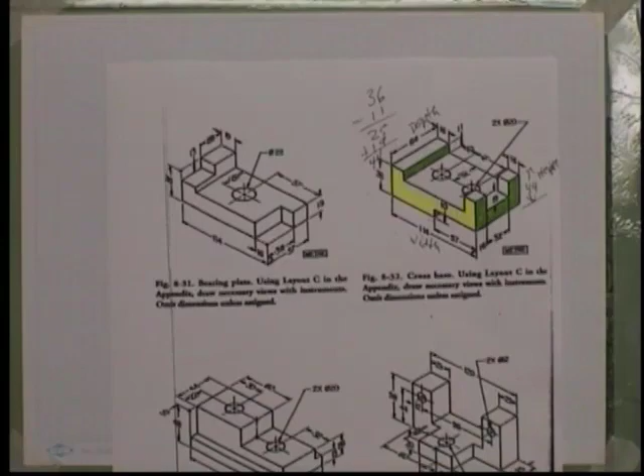When we're looking at an isometric, what we're actually seeing on the drawings we've done so far are isometric drawings, so we're pretty much just copying what we see. Remember, this is always the front, this is always the right side, and this is always the top. In an isometric drawing, this would actually be our start point. You can start anywhere, but it's easiest, especially at the beginning, to start from here, so you can actually see the isometric axes.

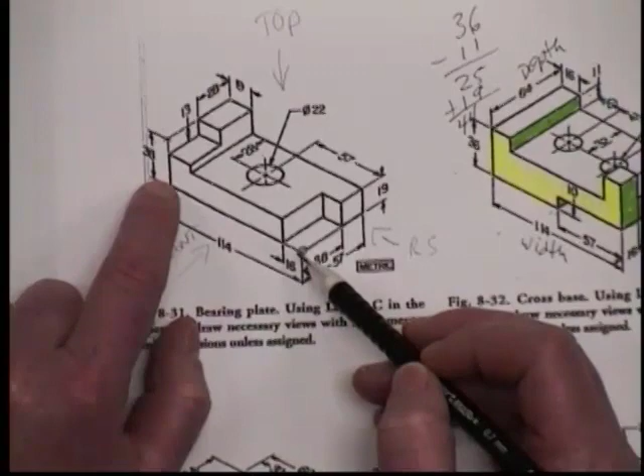So anything going back in the depth that we would see in the right side view is going to be at that 30-degree angle. Anything going to the left here that we would see in the front view, that would be a width dimension, is going back to the left and also at 30 degrees. And anything we see as a height dimension is going to go straight up and down.

So if we were to color code things that we were actually going to see, just like in this picture where we have yellow as the front and green as the right side, we could color code our lines. Anything going back to the right would be an isometric line at 30 degrees in that direction.

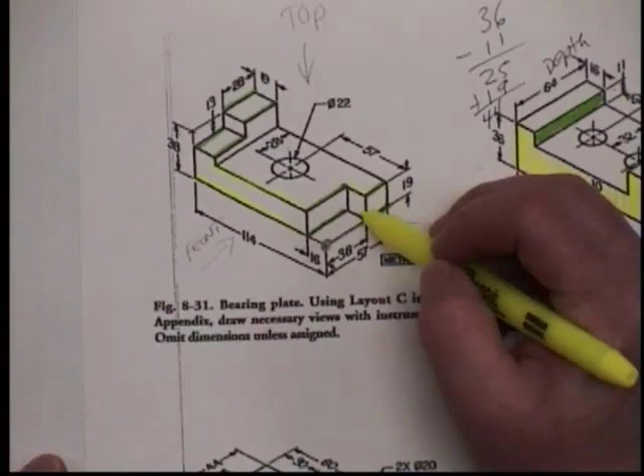So this just gives you a perspective on how this happens. All of these lines are going to go back towards the right, and they're going to be depth dimensions. And anything that's going back towards the left would be these yellow lines, and these actually show a width dimension.

So all of the lines that I have highlighted are either yellow for the width or green for the depth. And anything else that I don't have highlighted is actually going to be at 90 degrees for the height.

So if I took this pink marker and just shaded everything in that was going to be a height dimension, we could see that all these areas in pink are height. And I actually missed one in the depth—this one would also be a depth. So height dimensions are in pink.

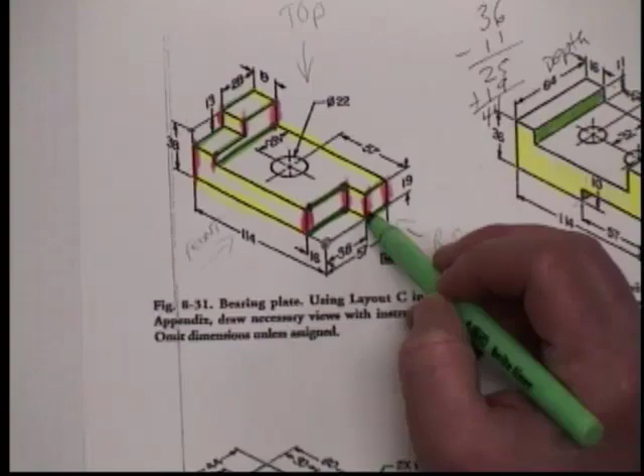The width dimensions are in yellow, and the depth dimensions would be in the green. So when we're looking at isometric drawings, sometimes you'll get confused because the lines start blending in together, so you just have to be real careful and know where you're at on the drawing.

Okay, so we're going to start out. This is a metric drawing, so we're going to use our metric scale. You're going to have to get your metric scale out. Remember, we're using the 1 to 100 scale, which is actually in centimeters, but each little notch here is a millimeter.

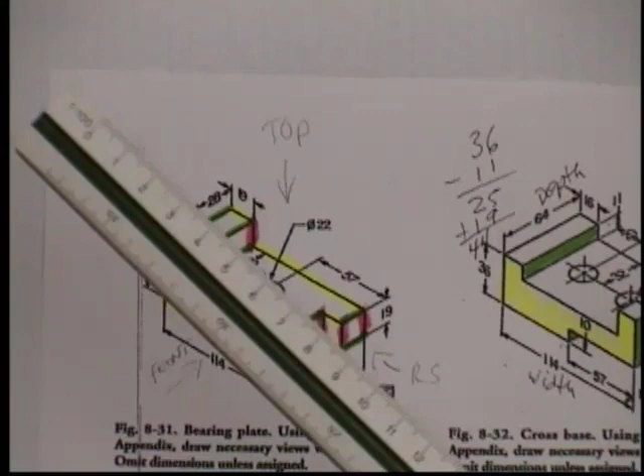My camera's zoom is not updating, but each little notch right there—let's see if it can focus a little bit better. Metric scale: each one of those little tick marks is a millimeter. So if we have 114 millimeters, then on the 1 to 100 scale, that's actually 11.4 centimeters.

All right, so on our paper we're going to put 2 of these objects on this sketch. We're going to draw one of them starting, I don't know, we'll try to start right in here and maybe put the other one up here. We'll see how much room that we have. So you don't have to start it right at the bottom, but maybe 2 or 3 blocks up.

And how do we know? Because I'm telling you to start it right there. When you've done a few of these, you'll get to see about where you need to start. For right now, this is your first one, so you just kind of got to trust me on this. And this start point, so I went not quite halfway over, and it looks like 1, 2, 3 squares up.

And remember, on isometric paper, you have 3 different lines. One of them is going to the left at 30 degrees, one of them is going to the right at 30 degrees, and then one of them is going straight up. So you just have to kind of remember where you are on your drawing, and you'll see what I mean in just a moment.

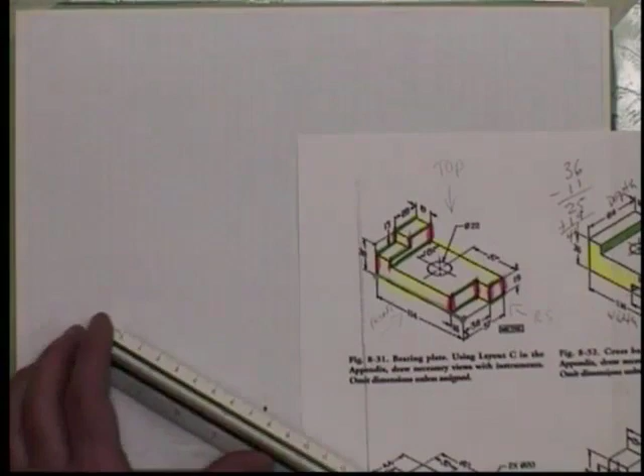So I'm lining my scale up. This is very important. You have a grid line that goes back to the left. You're going to line your scale up along that grid line, and you're going to make a line that is 11.4 long, along the grid line that goes back at an angle. And it just so happens that we end on another grid line.

So you can see my dots, and I went back along that grid line. I'm trying to zoom in so you can see my grid line. Still kind of hard to see, but my grid line goes back in a straight line towards my other measurement point. Once you get those dots, you can go ahead and make your line.

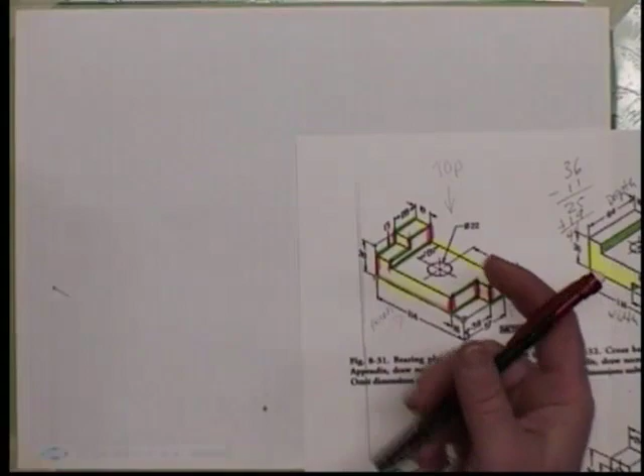Okay, we went 114 millimeters, and that means 11.4 centimeters.

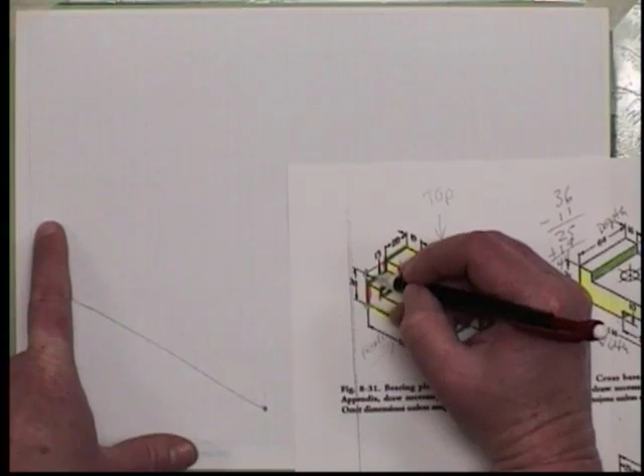So we were here, we went here. Now our next dimension, if we're just following our lines here, our next dimension to box this in is going 38 up. So our next point is going to be up here. We're going to go up 38, straight up. This is a height dimension because remember this was pink, and we're going up 38.

And on our 1 to 100 scale, 38 is 3.8 centimeters. So we're putting our scale along the line that goes straight up. If we do that correctly, we should still land on a grid line. We went up 38, which is 3.8 on our 1 to 100 scale, so we should land on a grid line. We should have landed on a grid line here and here.

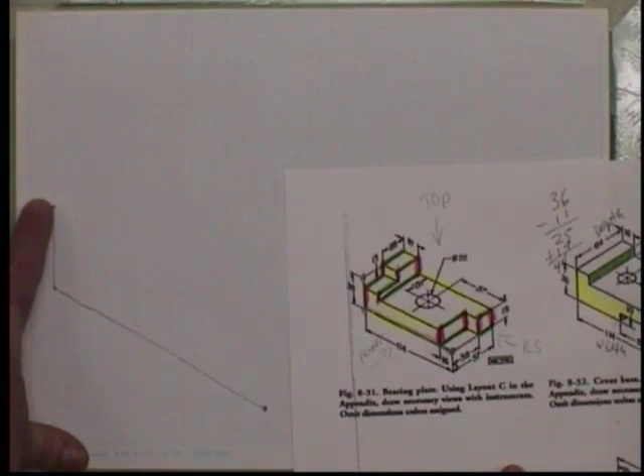So I went back along the isometric line, 114, and I'm going up 38. So this point, where my finger is, is the same point as this corner here. This point was the point that we got to from that first line. So if you draw a point on your object as you're drawing your lines on your paper, then you're always going to know where you're at. And that might not mean a lot right now, but you'll understand once you get drawing on your own how you can get lost.

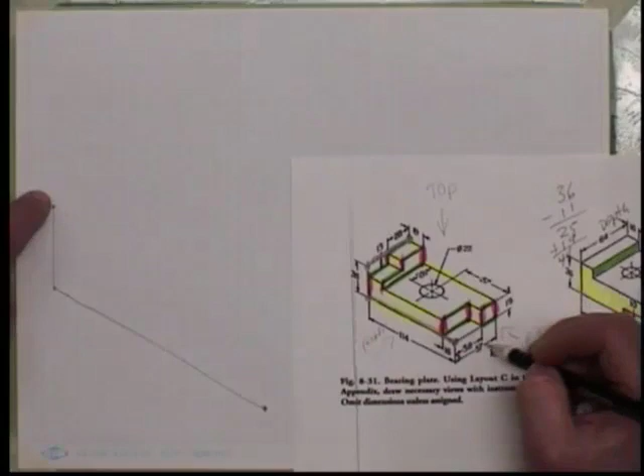So the next line that we need to make to box this in is going to be this line here. We're going to go all the way back to this point at the end right here. So that whole distance, we see that dimension right here is 57. So we were here, we drew a line back, we drew a line up, now we're going to draw a line, and this is a depth dimension because it was green. So we're going to go back to the right, 57. That's going to be going along this grid line here.

So this 30-degree angle that's going back to the right, and we need to go 57. On your 1 to 100 scale, that's 5.7, and that should land right on a grid line.

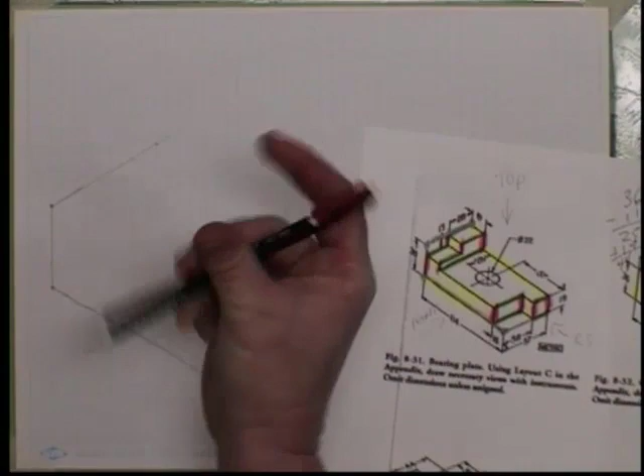So now, if we follow our sequence, we were here, we went straight up, and then we're going back towards the right, that 57 dimension. So now, we're right here on our drawing.

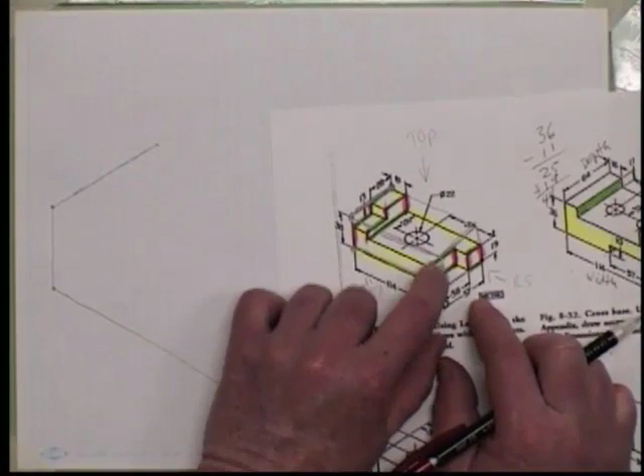If we want to box this whole thing in, we would come back down this 114. So what that would look like, because we don't actually have a line, if we were boxing all of this in on our paper here, we would have to actually make these construction lines that I just drew in. We're going to do that just because when you start out in isometric, that's a good thing to do just so you can see it.

So we're right here. We know the whole width of this thing was 114. We already have that dimension. So if we come back to our start point right here, we know that we can draw a line straight up, just like we did here. These two lines should be parallel. Just draw a line straight up, and then from this point, you'll come back along that grid line until these two lines meet.

So I drew my line straight up. It was a little bit too long, but when I brought this back along the grid line, I know that I can erase some of that.

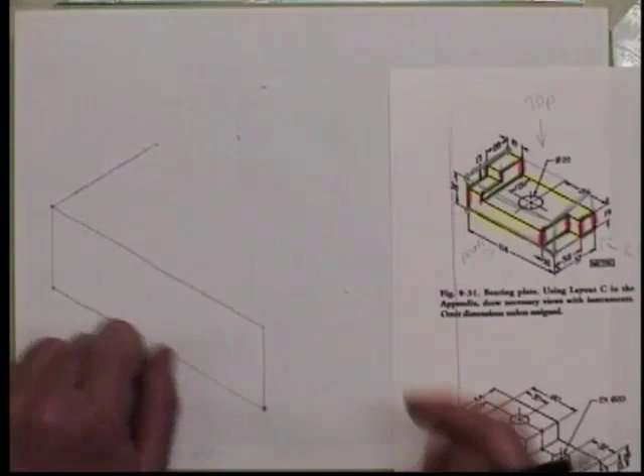So the great thing about isometric is once your lines start to meet up, you don't have to do a lot of measurement, but it can also get very tricky because you really don't know where you are on the drawing sometimes. So all I did is draw my line straight up, draw this one back along the grid line, and where they meet, I erase down to it.

Perfect. I'm going to do the same thing going back this way. I'm just going to take, at this point, make my line back to the right. I don't really know how far to go, but once I come up here where I actually did measure, I can just bring that line across here in my width. And notice this line is parallel here and this line is parallel.

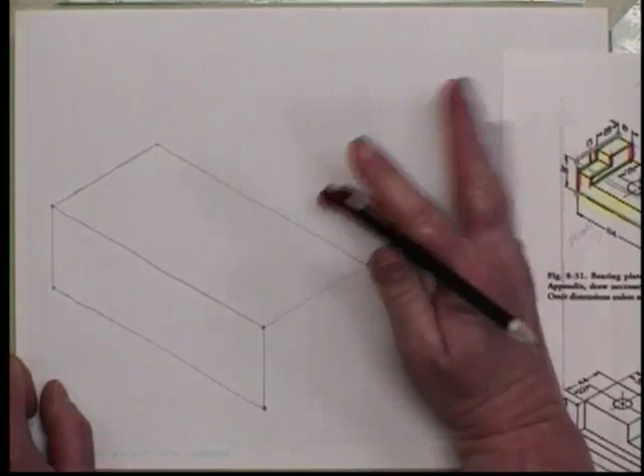So as long as your lines are parallel, you're okay. And then I know, okay, I need to terminate that line right here, and you can just erase what you don't need. Because we actually measured this line and this line, that's why we could do it that way. If we didn't measure, then of course we couldn't do it that way.

So we only have a couple more lines until this is boxed in. So we can do the same thing here. We can take a line straight down, and where this line meets it, we know then that's the corner. So I can erase what I don't need of the line that I brought straight down. So now I have this whole thing boxed in.

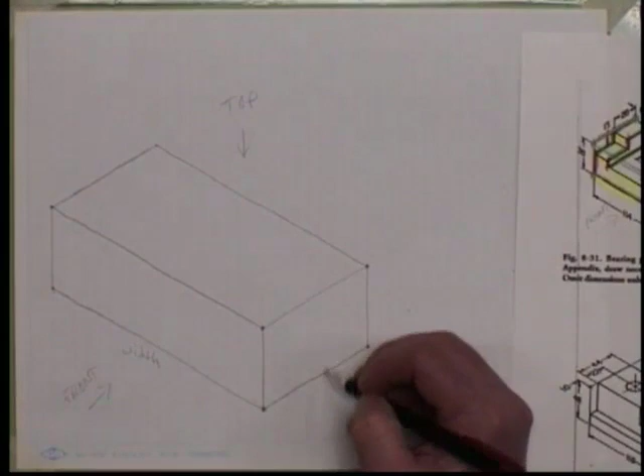So remember, this was my front, and you guys don't have to write this on here. I'm going to write it just so you can remember. This was my front, this was my right side, and this was my top. I see width here, I see depth on the right side, and then in the right side and front, I'll see height.

So now that I have this boxed in, I can go back in and put in the finer details. So if I start from that same start point in that front corner, I know I can go back 16 and over 38 to get this part right here that's cut out.

So I can do that with my scale. I'm going to take my scale and put a 16 dimension right along that line. And 16 is 1.6. Now this one happens not to fall on a grid line. I'm actually right in between grid lines.

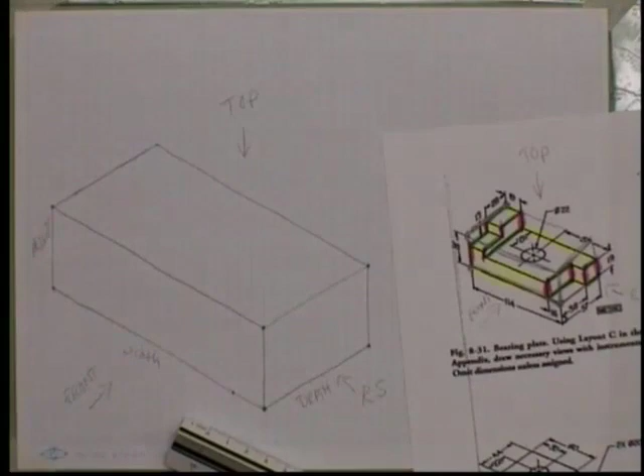So I went back 16 here. If you're in between grid lines, the best thing you can do is just keep your lines parallel. You know that here in this pink area where we need to go up, we're going to be at 90 degrees. We don't have a line to follow, but we can keep that parallel.

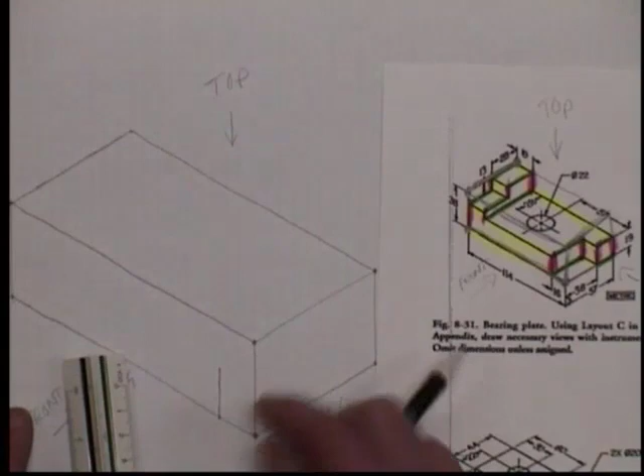So we're going to measure 19 straight up and down. So straight up from this line, I'm keeping it parallel to my two grid lines. I'm going straight up, so it should be parallel to this line here. And any grid lines that I'm in between, I just want to keep it straight up, because that's a height dimension.

Mine happens to fall on this grid line. I know that this distance was 16, so I know it just comes right back down along that grid line and meets up here. And I actually don't have to make that line. We won't need that line, so don't make it. You'll end up having to erase it.

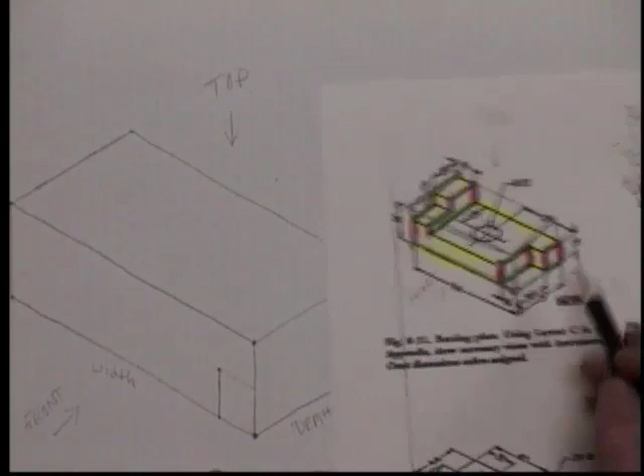What this gives us though, what this surface gives us, is we're right here now. So we are on top of the surface where the hole is. So this dot and this dot are the same spot on the drawing. So we do know that we need to go back at 38 here.

So if we go back to the right, we're still in between two grid lines. So just to show you what this is going to look like, I want to keep it in between my grid lines when I come. So I need to keep it parallel to this line, and I need that to be 38. So I'm going to have to actually measure this. It's going to be 3.8.

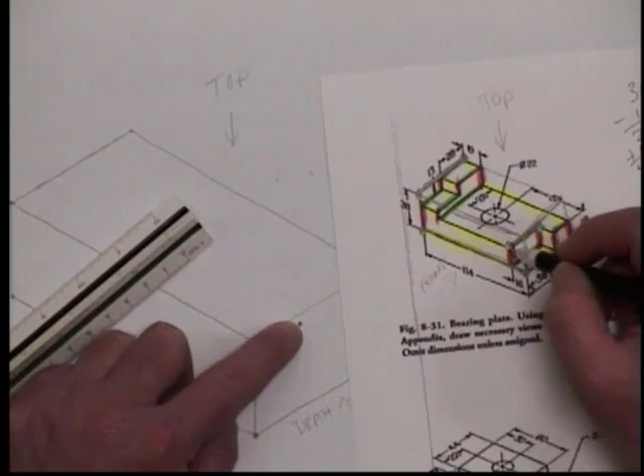So I kept it parallel to my grid lines. I went 3.8 over. So that puts me right here. So now I'm right here on my drawing. I know that I need to go back down that 19 for this corner.

I've already measured that, so as long as I'm staying in between the grid lines, I could even make this line first if I wanted to, because I know I need to go 38 back in this direction. So it doesn't matter which one you make first, as long as where they meet up, that's your corner.

So the face that I have right here is this same face that I'm coloring in on the drawing. So this rectangle is this face. And to get this smaller portion here, we know that we're just going to come back out and make that.

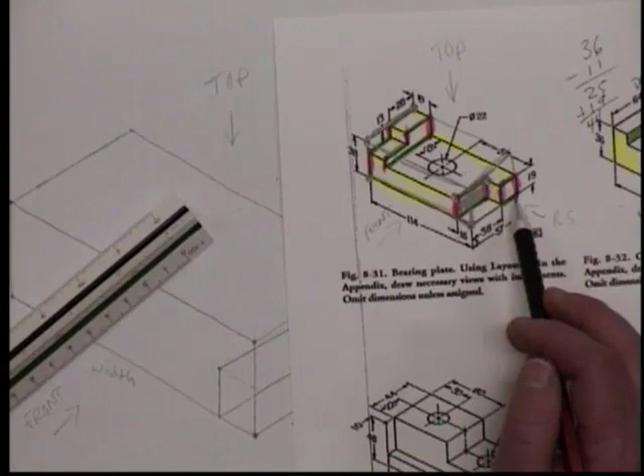So this was 38, or 3.8 on our scale. So now I know that I can come straight out here. I know I can go straight up to where these meet. And then this just ends up going straight over to where the line is already there.

So eventually all of our lines start to meet up. You just got to make sure that you're going in the correct direction. That's key.

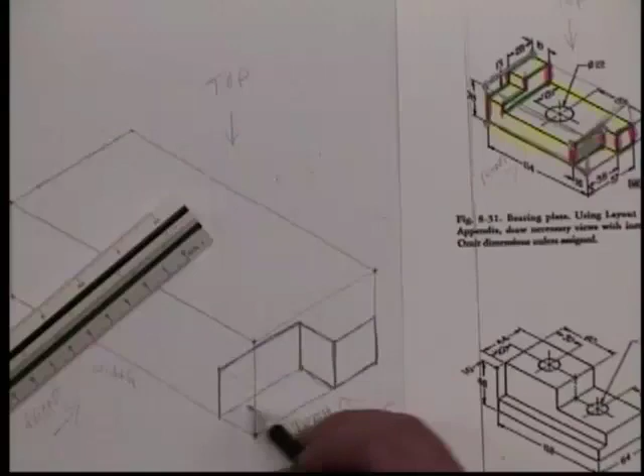Okay, and don't shade it in like I did. I was just trying to give you a better picture of it on the screen. These are still going to be nice smooth lines like our multi-views.

But now you can see this surface, and then we also have this surface right here, and we also have this surface.

And we're keeping our lines parallel. You'll notice the ones with the width dimension are parallel. The ones with the height dimensions, parallel. The ones with the depth, parallel.

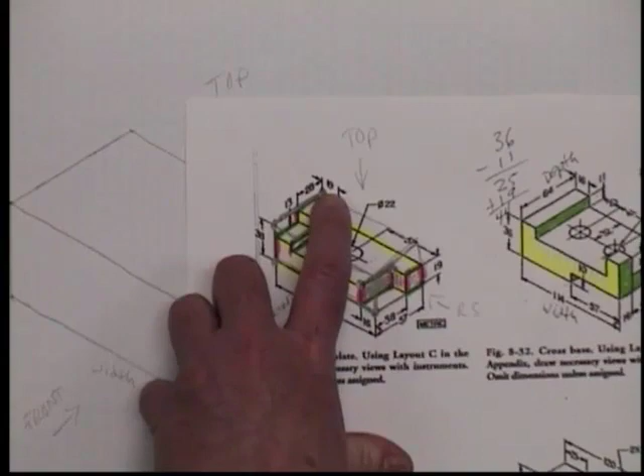So now we have the back part of this area that we need to work on. We know that we can come over 19 here and fill in some of this detail. So it would be easiest probably if we started back in this corner and just followed our dimension and went over 19 to get to here.

So let's do that. We're going to have to measure this because we don't have it already as a line. So we're going to put our scale along the line that we have and measure over 19, and it should put us on a grid line. So here's my 19 spot, and that puts me right here on my drawing.

And I know that I need to come out 28, so that 28 is going to be in this direction, somewhere along this line here. So I'm coming back this direction 28, and I see that from my dimension.

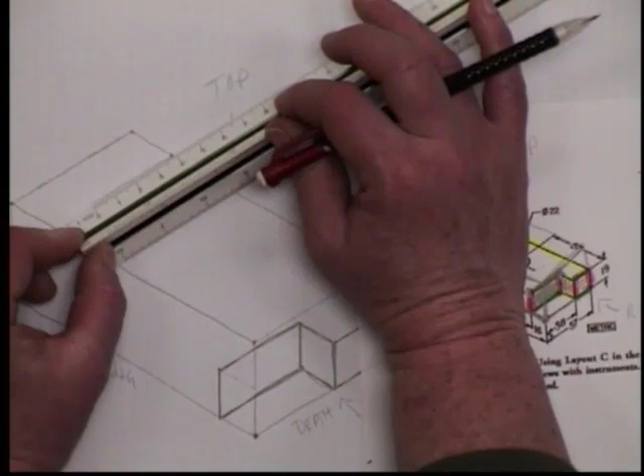So I'm putting my scale along that grid line. I'm measuring 28. So once I have that 28 line, that puts me right here at this corner.

And I know, 19 back, so if I'm going to make that top surface there, I've already got my distance. I just need to bring that back this direction. So now I have this surface here. It was 28.

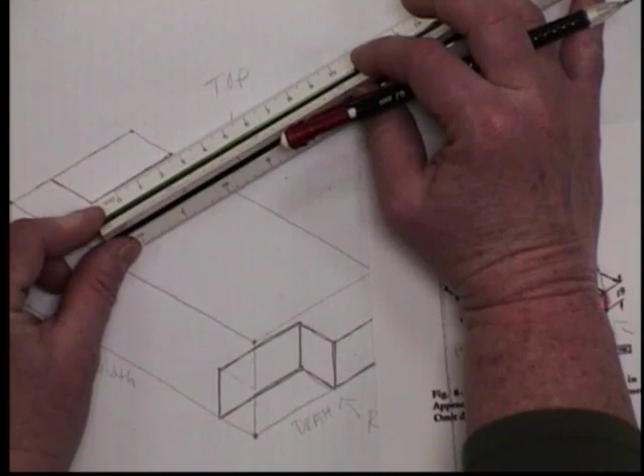Yeah, I'm sorry guys, I went 3.8 on that last one. So let me fix that. So I went a little bit too far, 1 centimeter too far. So it should actually be right here. So that looks more proportional.

All right, so the next dimension that we need to do, because right now we're right here at this corner, we need to go down 13. So we're going to go straight down, and remember this is a pink one, so it's going to be a vertical line. We're going down 13, which is 1.3 on our scale.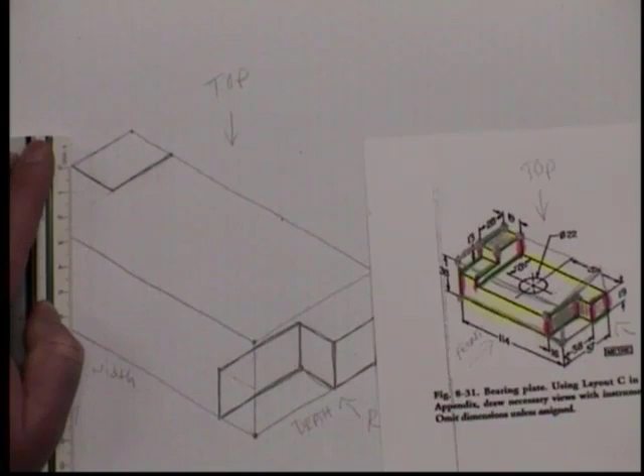So it's straight up and down—remember, that's a vertical line. Once you get it, we know we need to go straight up and down right here too at this adjacent corner. Just try to keep it parallel to your grid lines, because mine are landing in between grid lines.

Once you have those lines going straight up and down, then you have a width dimension. That should be parallel to the one on top there. So these two are parallel, and then these two are parallel.

And from there, it meets up with the frame of our object. So where we boxed it in, we just bring that line all the way out till it reaches the edge here.

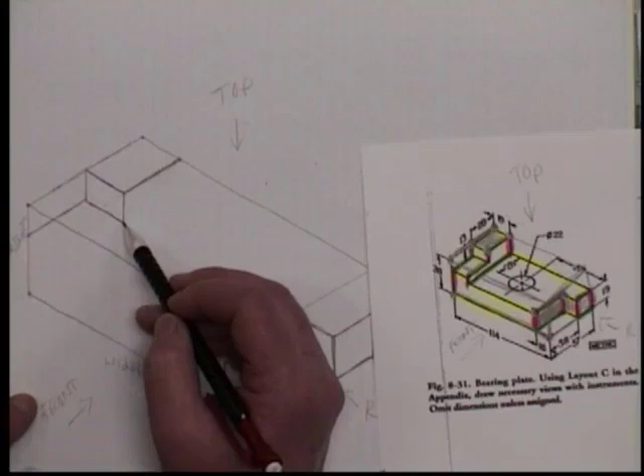Now we can't do that with the other side, because remember we have to come back in this direction—that width here. So we come back before we meet it up at that corner. A lot of times people will just try to make this line all the way out to here, and that doesn't work because they'll forget the width.

So now we have this face, which is where I'm shading in on the drawing, and then this face is here.

So we got a good bit of this drawing done. We still have one more main surface that we've got to get though.

We know that the main surface here is up 19 from the bottom, and we already have that corner made. So we have that surface.

We've just got to take our line back, and you'll notice there's a little bit of an area right here that goes up in the height dimension. So we can't just make this line to the corner there—we have to make sure we keep that little bit of height left too.

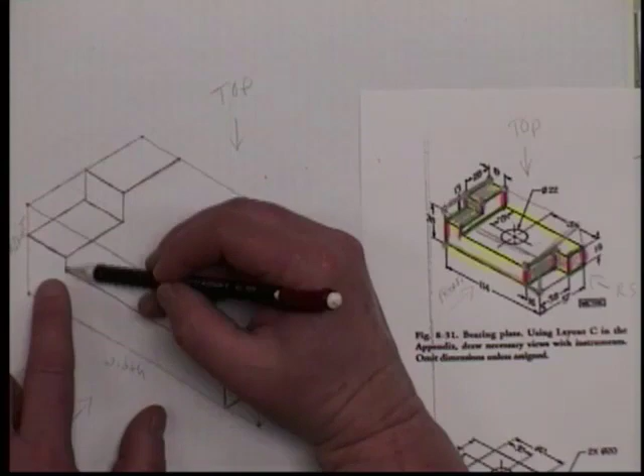So the easy way to do that is just make a line straight down here. We're not given that dimension, so we don't know how long to make that line, but we do know that this corner goes back to meet it. So if we were just to draw this corner back at that angle where these two lines are parallel, then we know how much we need to erase off right there. We knew that there was just a little bit of a height here, and it should meet up with the surface there.

Same thing on this side. We know that this corner is actually this corner on our drawing. We know that goes back. We need to create this line straight down. We don't really know how long that line is because we're not given that dimension—we could do the math if we wanted to, but we don't have to. We'll just make a line straight down here.

And where this line comes back along that grid line, where they meet, that's how we know how long that line should be. All these lines should meet up because they're corners of the same object, and then those two corners should meet with a parallel line that's parallel to the depth dimension. These just happen to fall on a grid line.

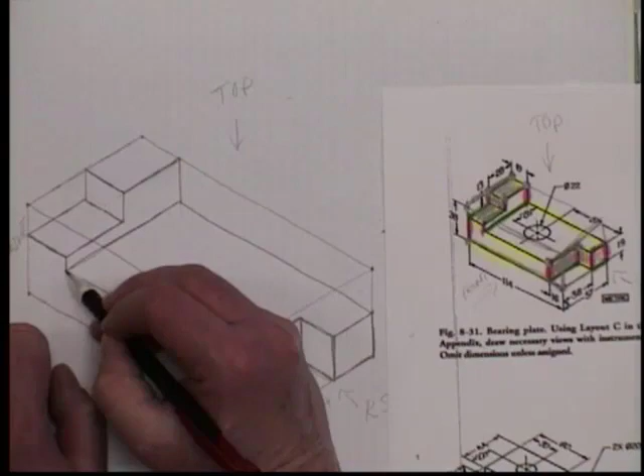So I'm darkening in my lines heavily so you can see them on the screen. But remember, your lines are just a nice, smooth, single stroke, darkened line—an object line, not a shaded in line like mine.

Okay, so you can kind of see how this object is shaping up. The only thing else that we need is our hole.

So in sketching holes, remember, we have to create a box that is the size of the diameter of the hole, and we need to know where the hole is located. So we're given two location dimensions—the 57 and the 28. And then we're given the size of the hole, which is 22.

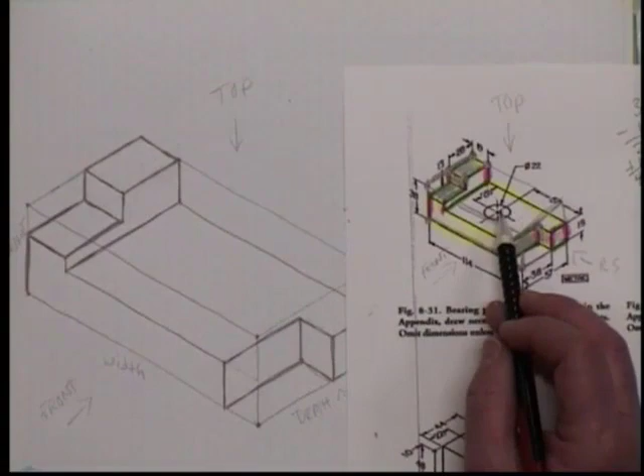So the first thing that we would do is measure the 57 and the 28 to get the center, and then we would box in, using our grid lines, the size of that diameter.

So to do that, you're going to use your scale. We're going to get that 57 first. So let me darken in some of my lines.

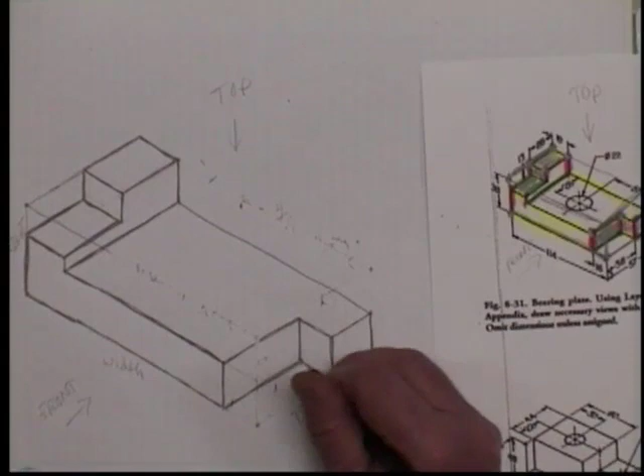And you can kind of, because we no longer need some of these construction lines, go ahead and erase part of the box that we initially made to get the height, width, and depth. We don't need all of that anymore, so we can erase some of that out just to get rid of the excess lines.

Remember, I'm darkening in just so you guys can see.

To get the location dimensions for the hole, we're going to measure - we're given this 57 from the corner here. I usually just keep my scale at the same point where it's giving me the dimension, that's the easiest thing to do. So from that point in that corner, I'm going to measure up 57.

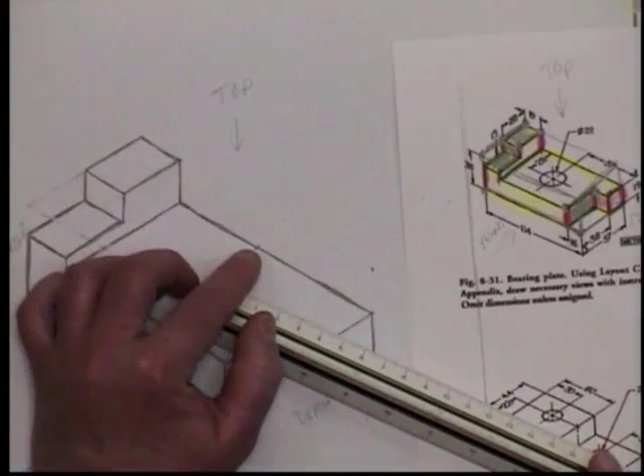Along that line, I'm putting a little measurement mark right here. You can see my little measurement mark. And then from that mark, it's telling me that I need to go in 28. So it actually landed on a grid line, so I'm just going to follow that grid line in with my scale and measure 28, which is the 2.8.

So if I make center marks, I need to make them parallel to my grid lines. Remember, all the lines are parallel to the grid line. So that's my center mark for that circle.

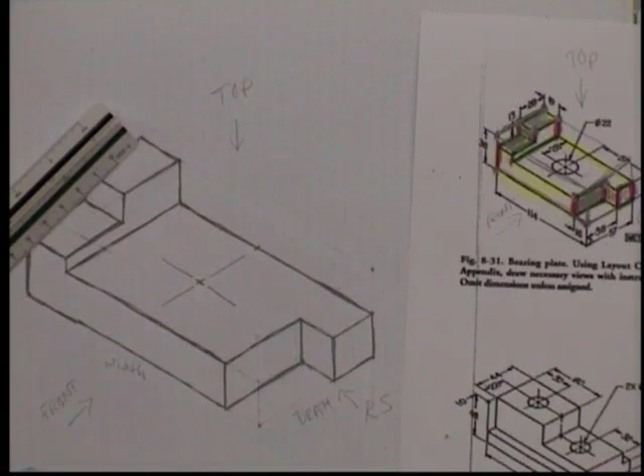And I know the diameter of the circle is 22. So if I'm going to box that in, I have to know the radius, because when you create your box, remember we go to either side of the center point, the radius. So that would be 11. So I would just take my scale and do 1.1 on all sides, and just put a little measurement mark there.

Make sure that you're keeping it parallel to the grid lines, and you're measuring along the grid lines too.

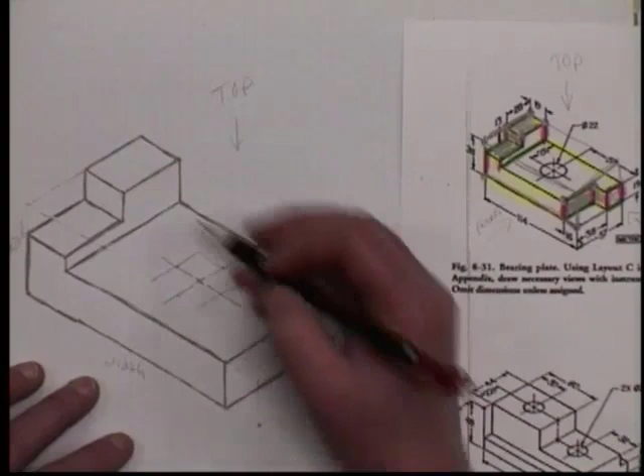When you're doing your box, the same rules apply. You want it to be a construction line, but you also want it to be parallel to the grid lines. And you'll see why this is an ellipse when you have this box made. So there's my construction box. I could probably do a little bit better job with this line, making it parallel.

And then, just like you did with your circles, you'll do a quadrant at a time, and you'll see that when you do the quadrants here, that they are more elliptical, because two of the quadrants are a lot longer in your arc than the other two quadrants.

So now we have a circle. We can erase our construction lines for our box. And the only thing that we would have left is just to clean up our lines and erase our measurement marks and that kind of thing. But that gives us an isometric of figure 831.

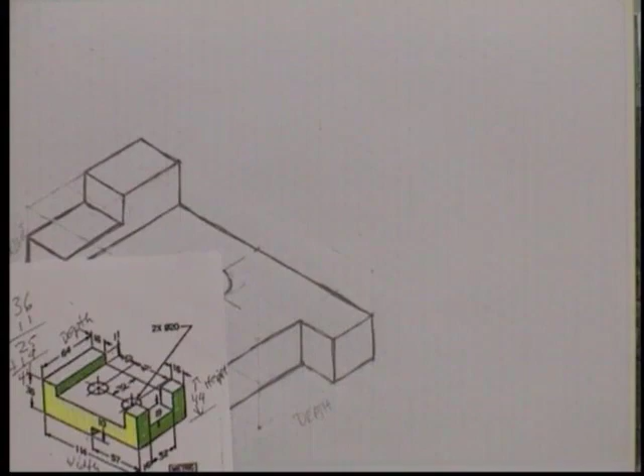Okay, for the next one, we're doing figure 832. So if we look at this object, we know that the width, again, is 114. The height on this side was 36, but remember, overall it was 44 because we had to add the 19 here. And then the depth is 64.

So on this one, it's going to be a little bit more confusing if we box the whole thing in. So I'm going to show you how we'll start out with the full width, but we'll only go up 36, and we'll go ahead and make this surface, and then we'll come back and start back at the start point to get the rest of this front area.

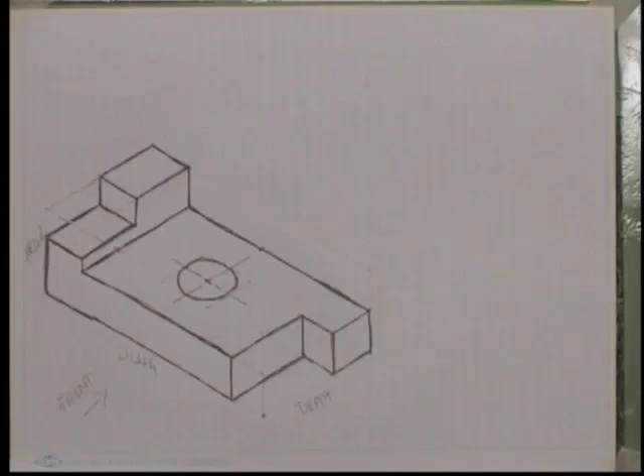I'm going to use the same paper. On your paper, we drew the first one right in here, so our second start point can probably be right in here - that would give us plenty of room. We're eyeballing it; we can kind of tell, since we've done one, about how long this is going to be, so we should be able to go back and have plenty of room. We might even be able to go up a little bit on that.

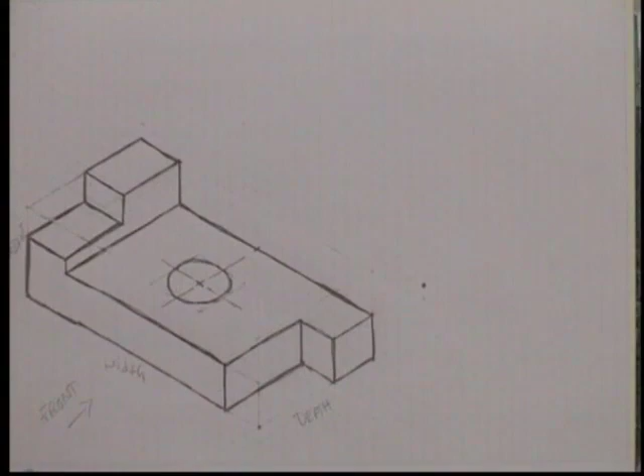So for now, this is okay - we're doing a sketch, these are our first isometrics. So we have our start point. What we want to do is take our metric scale, just like we have been, and we're going to go in this direction to the left, that 114. So the same thing applies - we want to line it up with the grid line. And remember, 114 is 11.4 on the 1 to 100 scale.

And so I'm pretty close right here. That's okay. Now, if you're running into it, then you probably do need to move your start point up a couple notches, so you don't want to run into it. So this was my start point, I went back 114. I'm going to go ahead and make that line.

And we're on a grid line, so basically you're just following the grid line. So the same thing that we did down here with our start point and our end point. We started here, we went back towards the left along that 30-degree line towards the left and made this line.

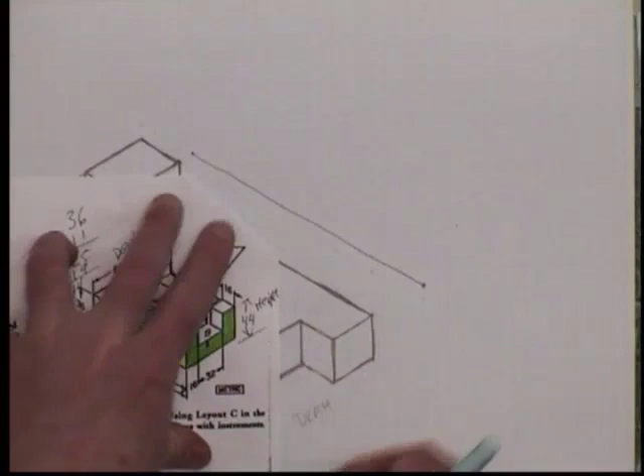Before we said we boxed it in, this time we're going to do it a little bit different. We're not going to box everything in. Before, I still had the dots showing you where to go, but this time we're just going to follow the lines of the object. So right now, we are here.

So this dot and this dot, same spot. So we went 114 millimeters back. And we said we're not going to actually box this in, we're just going to go with the lines that we have. So if we look, this is a 36 dimension going straight up in our height. So we're going to do 36 up from this line. So from this dot, we're going up 36, which is 3.6 on our scale.

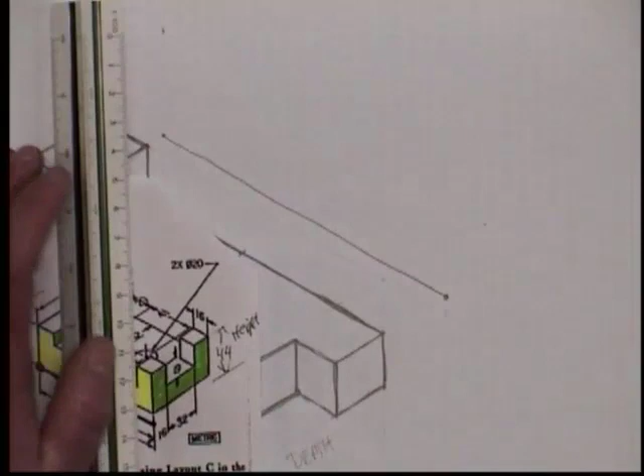And that should put us right at a grid line. We're like half a millimeter below that grid line, so just go ahead and go to the grid line. So now that we have our point, we can go ahead and draw our line up. So that puts us on the object, that puts us right here.

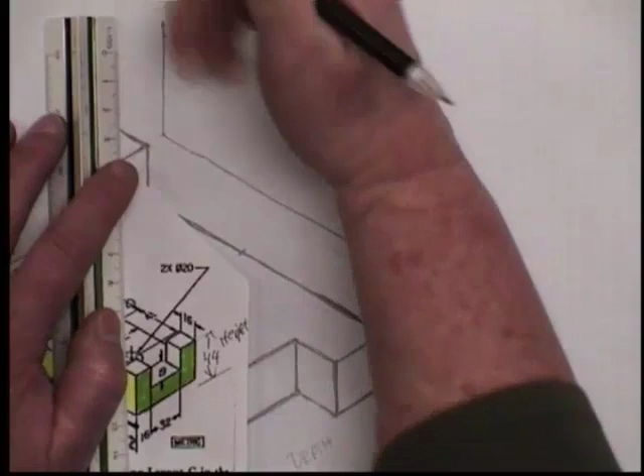It was 36, and we're going straight up. So 36, actually, I'm sorry, I went up too far. We're at half a grid line. We should be right at half. Yeah, it's not quite right at half. That's why I went ahead and put it up to that grid line. We're just a little, like a hair below the grid line. So we went up 36.

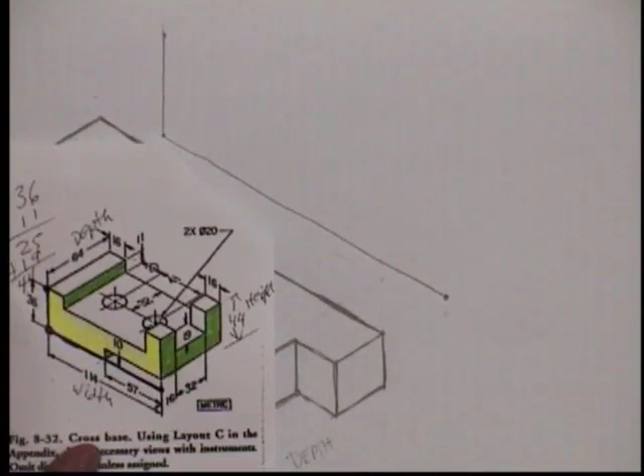And now if we're following our paper, following our dimensions, we can come back in this direction that's parallel to our first line that we made. We can come back 16 right here. So this time we're not boxing it in, we're just following the lines of our object. So from this point, regardless if you had it at half or on the grid line, it should be right in the middle of half and the grid line, just a hair shy of a full grid line. But wherever it is, it needs to be parallel to a grid line. So along that parallel, you can use your scale to make sure you're parallel. Line your scale up parallel to the grid line that's going in the direction you need it to go. And you're going to come back 16, which is 1.6.

Okay, so this line and this line should be parallel. And if we look on our paper, now we are right here. So we're right here, right here.

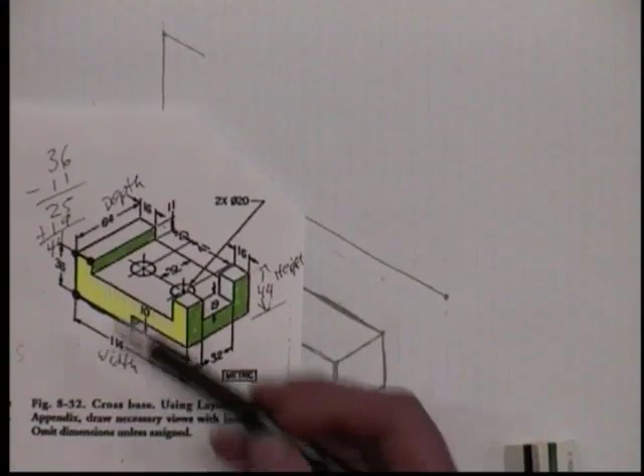And then in order to complete this face of the object, we can go back in our depth 64. Mine may go off the paper a little bit, yours may go off the paper a little bit. That's okay, just be in line with a grid line, be parallel. So we're going to go 64. It's okay, just keep making it. Just be in line and parallel. And if it goes on your desk, you can erase it.

So mine ends up being on the paper, but off the grid part. And that's okay, we could move it and start over, and start somewhere down in here, but we're okay. This is to teach you how to get in the process of doing isometric.

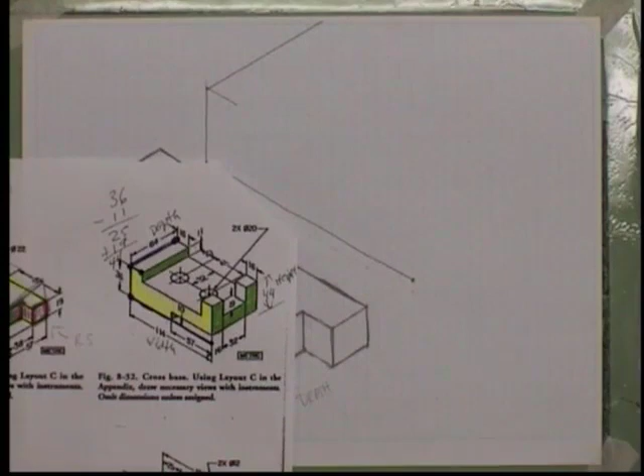So now, if we're looking at where we are, we just made this line. So now we're back in this corner. And we already measured this 16 line, so we can make another one that's parallel out here. And if you're off your paper, you need to make sure. A great way to do this would be to line your scale up and just try to keep it at that same angle as you go.

If you're not off your paper, then you're okay because you can follow a grid line. Just make sure that you are parallel. I'm just going to create a line so I know that it's parallel. I'm not measuring anything because I've already measured it here. I just want a line that's parallel to this line. And then whenever I get that line, I know that I could go parallel along the grid line back to meet that line. And that gives me that surface of my object.

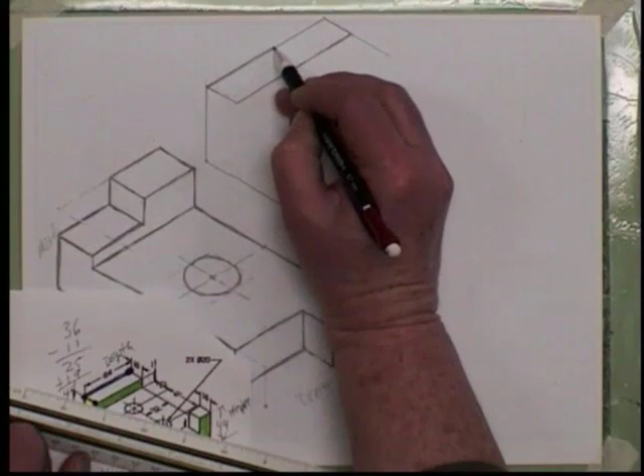So once I have those lines, I have this surface completed. So where I'm at, I created this line down, I brought the line up to meet it. So now I have all of that complete.

And I know I don't need the rest of my line up here, so I'm going to go ahead and delete it.

Since I'm following my dimensions, the next thing to do would be to go down 11. So if I'm at this back corner following my dimensions on my paper, I'm going to go straight down 11. For this is the height dimension, so remember height dimensions are vertical.

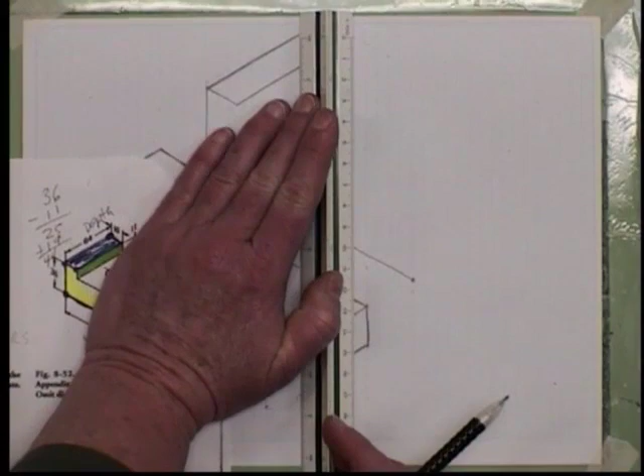So back here, I'm on a grid line. If you're not on a grid line, that's okay. You might be just a tad off. I might just be a tad off, but make it parallel to your grid lines nonetheless. And we're going to go down 11, and that's going to be a straight down vertical line because it's your height dimension.

And we can go ahead and make that. We can make one straight down here on this corner to make sure you are parallel. We don't even have to measure it because we know that we measured on this side, so as long as we're keeping our lines parallel to our grid lines, we're going to be okay.

And we can erase out anything extra. So our grid lines are just there to help us stay parallel.

So now what I've done, by going down 11 here, going down 11, lining those up, I have completed this view that's shaded in the green there.

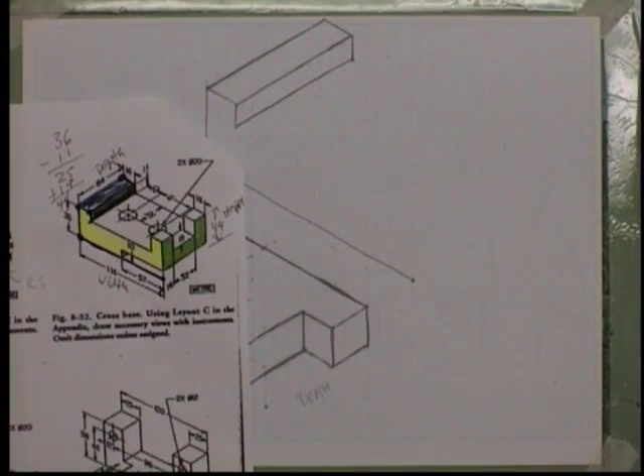So now where I'm at on my object, I'm right here where my finger is and right here where my pencil lead is. So I know my next steps are to come back forward, but I really don't know how far to come back forward, and I don't want to do the math, so I'm going to come back down to my start point and work my way back up till I can get the detail in the front here.

So doing that, I know I need to go 57 back along my first line that I made, and then I need to go up 10. So from this start point, we're going to measure 57, and we're going to go straight up vertical 10. So we can do both of those measurements.

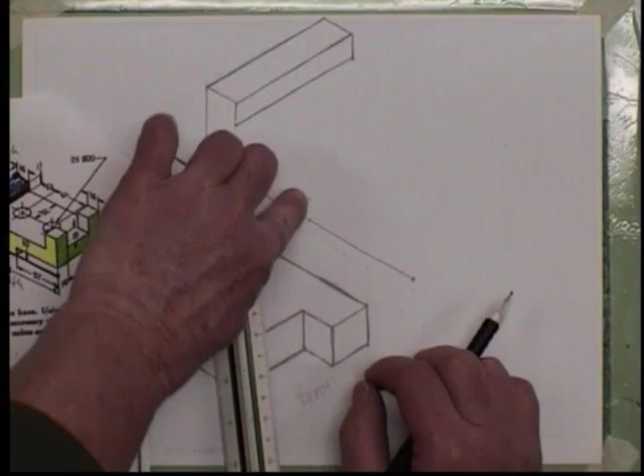So my first one fell on a grid line, but my second one was in between grid lines. But again, as long as you're staying parallel to the grid line, you're okay. The first one was 57, and that second one was 10.

So I don't have to make this line. I'm actually going to erase that line. But I do have to make my vertical line that's straight up.

And then we know that it actually comes down and is parallel to this line that we're going to erase. So before we erase it, let's keep it there so we'll stay parallel.

I'm putting a little mark so I know how far to come, and this was that 10 mark, and all I did is line it up where it was here. So I can make my line parallel to the line that I already have at that same point.

And once I have that, I can erase this if I want to. So all we needed to do right there is just make sure that we're parallel.

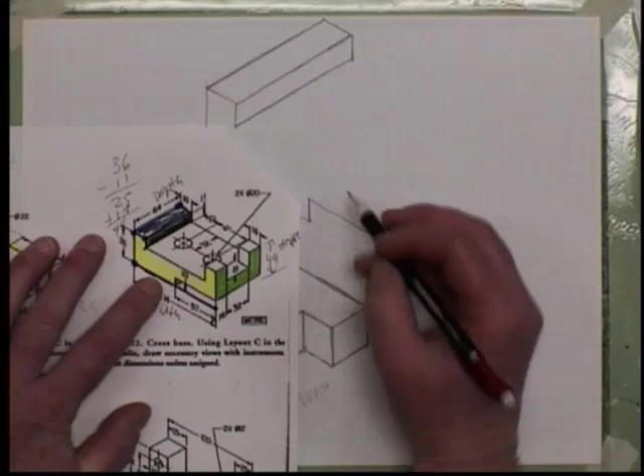This little piece that we see here, we will see part of that line. We know it goes back through the object because we've drawn the multi-view of this, but in the isometric we don't show the hidden lines. We just know that it just goes back in that right direction, that right receding line direction, until it hits the line that we just drew.

So on our object, we went back 57, we went up 10, we came back down to where it was parallel, and we went ahead and made that small line right here.

So right now, we are at a good point where this point and this point are the same. So if you look at my fingers, this point and this point are the same on the object.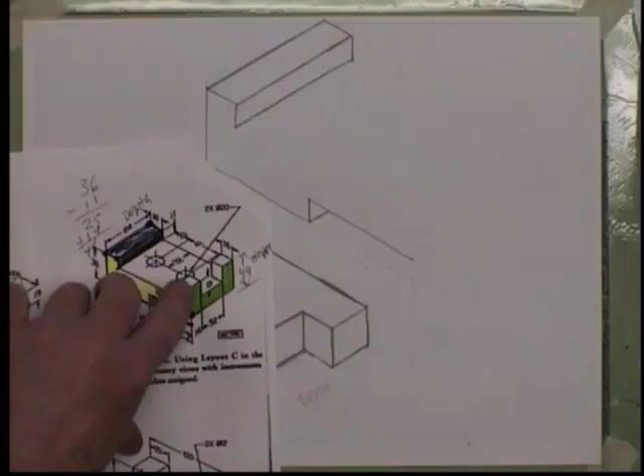So our next step, we don't really know what this height is right here. We know from the surface it's up 19, but we really don't have the thickness here. We could calculate it, but we don't have to, because we have a common point.

We have this point on our drawing, and we have this point on our drawing. So we know that this point comes in contact with our main surface here. So we're just going to bring that line down and bring this line up until they meet.

Now we know that we have a little bit here that we have to create with these little tower details, but for now we're just going to let those meet up so we can measure up 19 from there. So on your grid paper, we're not measuring anything, but if you want to use your scale to kind of keep everything in line, you can do that.

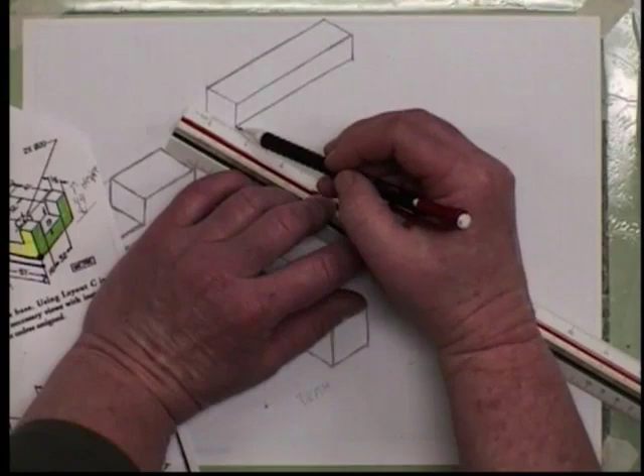Just make sure your scale is parallel. We're just making a line down that is parallel to our other isometric lines. And then from this corner, we said we were going to make a line that was straight up. Now, we don't really know how far that line straight up should go just yet, but we know that from this point here where they meet, this tower, this detail that kind of looks like a tower, is 19 from where they meet.

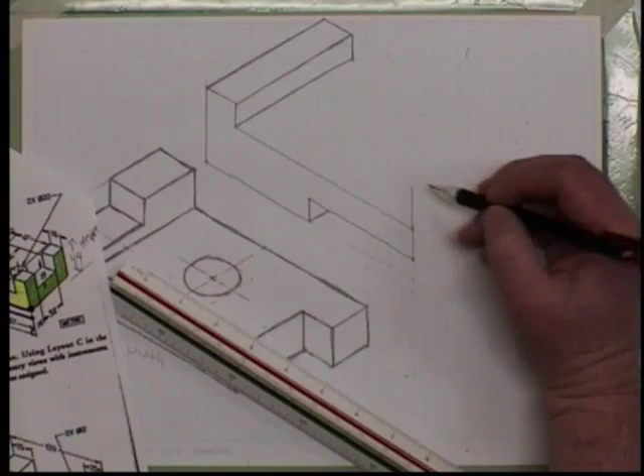So our measurement start point is actually right here, and we need to measure up from there 19. I'm pretty close to it as it is.

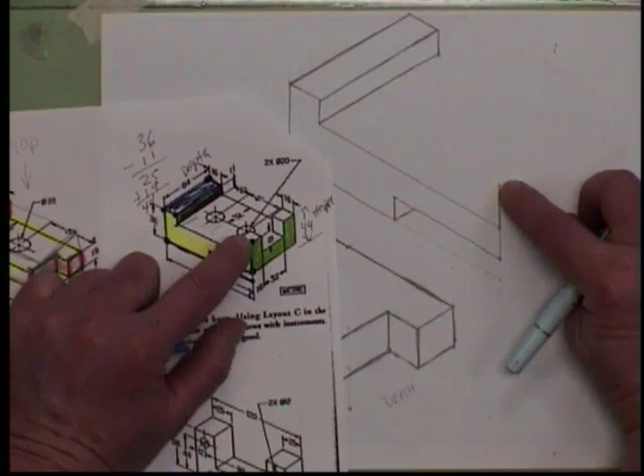Alright, so where we're at now, we have that line that went down here that was 10 up. We just went ahead and drew a line straight up right there. We brought this corner down to meet that line because we know that from that point we needed to measure up 19. So right now we have this corner made, okay? So where my finger is here and where my finger is on the original paper, that's where we're at.

So now we can come in here and make these little squares on the top, which are 16 by 16. So from this point, we're going to go all the way around and make a 16 square. The key is to stay in line with your grid lines.

That's 16 on this side. Since I'm at a corner and on a grid line from here, I'm going to go and do the other side first. And then, of course, they're going to meet up, so as long as I'm parallel, I only have to do 2 measurements.

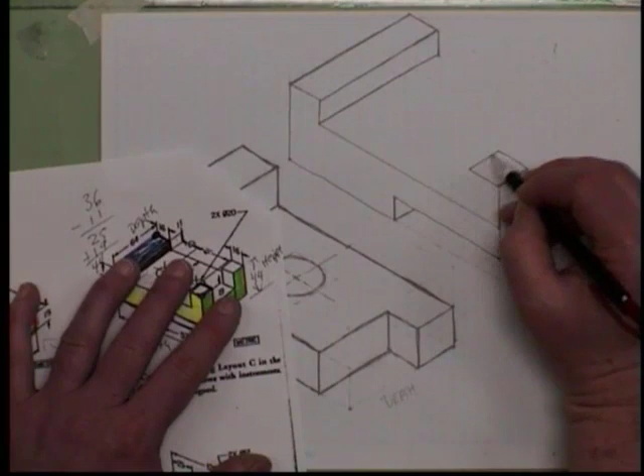So right now I'm only going to do the 1, and then I'm going to work my way over and do the other side. Because I know from this corner, it's going to go straight down to meet that surface. So as long as I'm parallel to my grid line, I can come down to meet the surface that I already have.

I know that I need to erase some of this out so we can really see it start shaping up as the object. Again, I'm really darkening mine in so you can see it. You guys just need to do one smooth straight line.

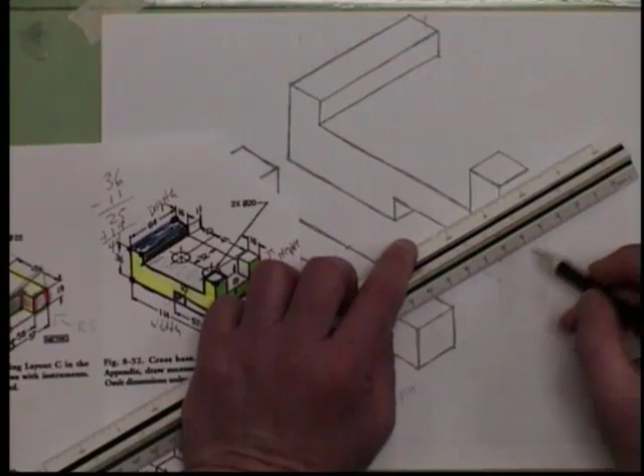And then once we do that, we'll go straight up with a line. But we're going to measure that 64 first. And when you're measuring, just make sure that you are staying parallel, because isometric lines are parallel. So I went over my 64.

One thing that's going to really help me out is I already have this made. So a lot of these dimensions I can just transfer up once I get to that same surface. So for right now, what I'm going to do, I know I need to go straight up from this corner. So I'm going to go straight up and stay parallel. I don't really know how far I need to go straight up, but I'm going to just be parallel lines straight up.

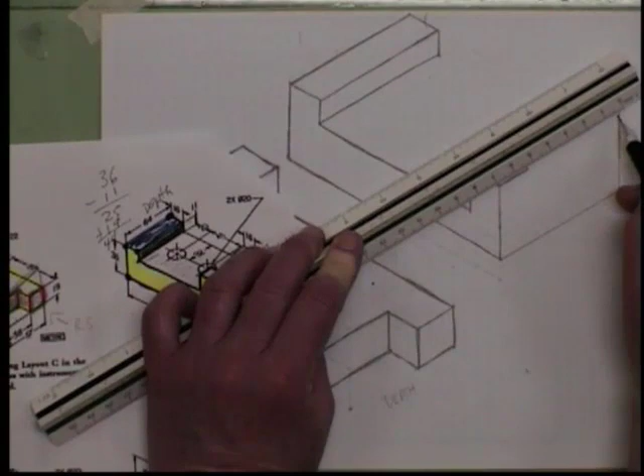And I can see where my grid line is. And if you're not right on a grid line with this line, just make it parallel with your straight edge, and you can see where this line is and where it should meet over here. So I'm just taking that. I'm not measuring anything right now. I'm just making a line straight out to where if I did come all the way straight out, it would meet this one, because I know that's my height. I don't have to measure anything when I know the line is in line with it. So anything excess, I can erase.

So in isometric, use your resources, use your heights that you've already measured. So now I'm at the right height. I know that I need to make a line parallel to these two lines in that same direction they're going. I don't know how far to make them, but I know I need a line that's parallel.

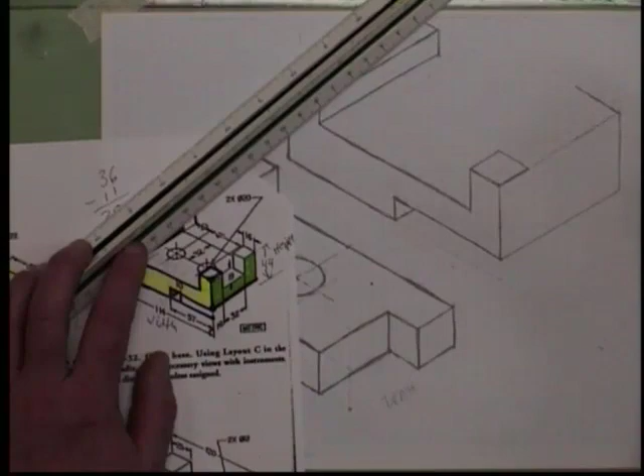So I'm just keeping it parallel with my grid lines, and then I'm looking to see where this line is, because that's going to give me my distance. I'm just making sure I'm staying parallel, because I'm not on grid lines at this point. So right now I haven't really measured anything. I'm just using parallel lines on the grid lines, and lining this line up with this surface here.

And then I'm erasing the excess. So far I have measured nothing. So far I did measure over 64.

I made a line straight over. I made sure it matched up with this line. And then I made a line back to the left along the grid line, and made sure it matched up with this line. Now the one thing I'm going to have to do is measure the 16 I need to come back this way, because I really don't have any lines I can match up. So I'm coming back this way 16.

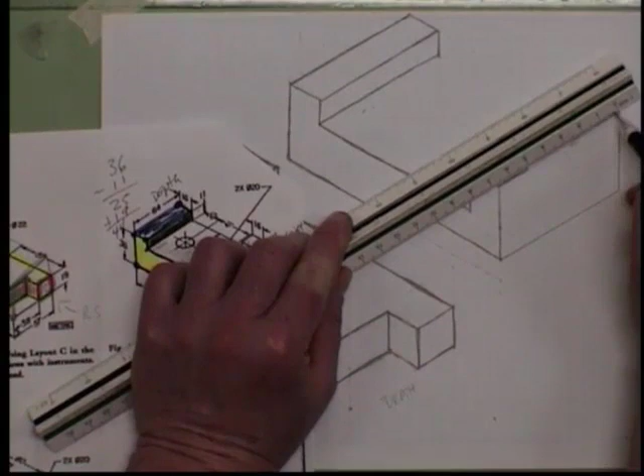So I'm making sure I'm putting my scale along that line and putting my 16 mark. And then this line I'm getting ready to make is going to be parallel to these two lines and the line back here.

Now my square ends up where it's supposed to be, and I can erase out any excess lines that I may have had.

So to catch us up on where we are on our paper, we went up here, brought these lines over, transferred them, so now we have this surface and this surface. So the point where we're at now is right here, which is the same point on my object, on my paper. And we're going to go straight down to where this surface meets.

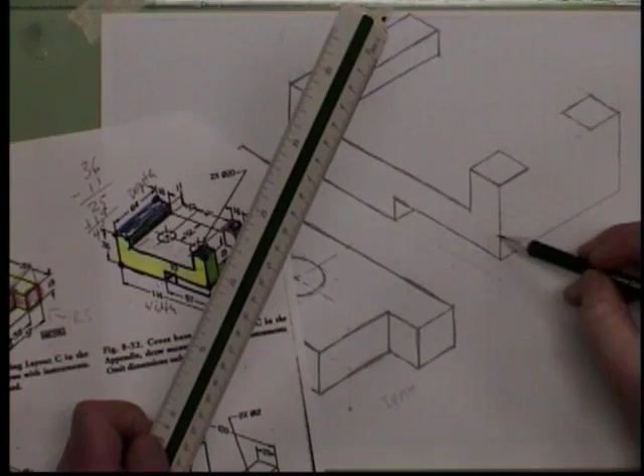So one way we can help ourselves with this surface: we already had a point where we brought that surface here. We know we can bring that straight back too. And if you've erased it so much you can't see it, you might want to bring that back just by lining up your straight edge with the line you already made and putting yourself a little notch right there.

If you still have it, then you simply line up your straight edge parallel to the line going back in this direction, and just lightly draw a line in there, because you're not going to need all of it, but you will need it to know where to bring this corner down to.

So this corner goes down to that line, and this corner does the same thing. So as long as you're staying parallel, you're good. And you don't really need the excess in here, so we just trim that out.

We need to do the same thing with this back corner where we see it. Just making a line down. I know it's going to line up with the corner I just made. We don't really have to measure it, though we do know it's 19 - we know we can just bring that line down. It lines up with this corner, so we bring our line up to meet it. And we can erase the excess.

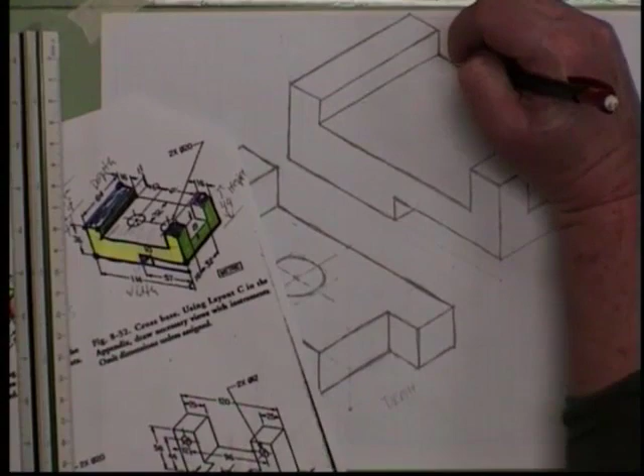And for the sake of time, we're not really going to do the holes on this one. We'll skip the holes, but we do have one more line to finish us out, and it's from this corner down. So this corner needs to meet our little tower piece over here on the right.

My lead keeps breaking.

So like I said, for the sake of time, right now we won't do the holes. That's what we have. When we do this in an isometric on our drawing sheet that we'll pick up tomorrow, we will put the holes, so we'll end up having to measure and get those intersections then. So we won't be missing out on it.